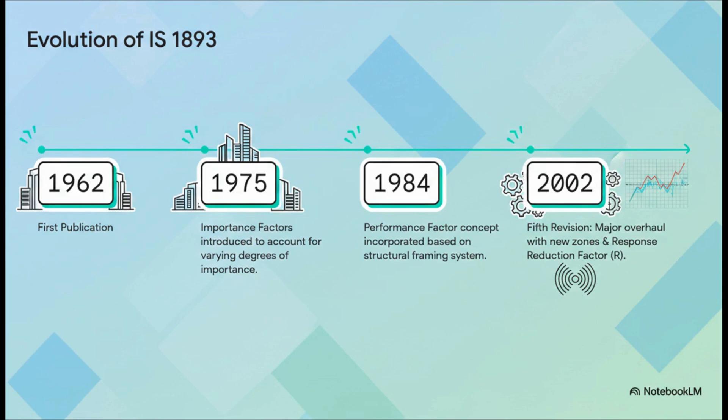Back in '75, we got importance factors. The idea that a hospital is more important to save than a warehouse. That makes sense, right? But wow, that fifth revision in 2002, that was a total game changer, heavily influenced by what we learned from the Bhuj earthquake. It really changed how we think about seismic design in India.

So what actually changed in 2002? Well, a lot. The seismic map was totally redrawn, for one. They got rid of Zone I because, let's be honest, no part of India is completely safe from earthquakes. But the real headliners, the two things that changed everything for designers were, one, specifying different rules for 3 different soil types, finally recognizing that building on rock is not the same as building on soft soil. And 2, introducing the response reduction factor, or R. This was a huge deal because it finally put a number on a building's ductility, a concept we're about to dive into.

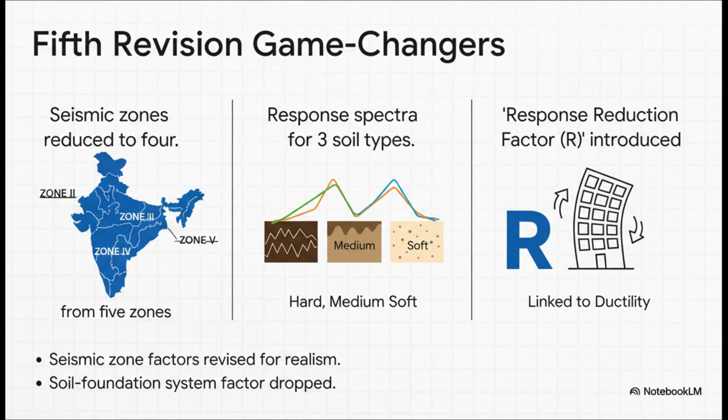Okay, so this leads us perfectly into the why behind the code. See, if you don't get the philosophy, you can't apply the rules right. IS 1893 is not about creating earthquake-proof buildings. That's just not realistic or affordable. It's about managing risk. It's about designing a building to perform in a very specific, predictable way when an earthquake hits. This quote right here from the code, this says everything.

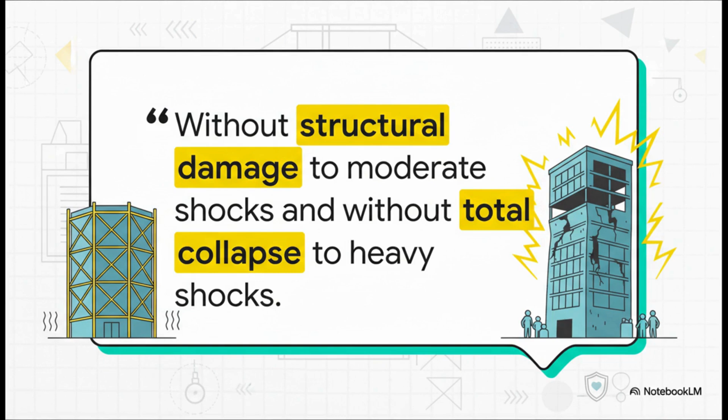It's a 2-level approach. Level 1, for a minor, more common earthquake, the building should be fine, no structural damage. Level 2, for a rare, massive earthquake, the building is allowed to get seriously damaged. It might even need to be torn down later, but it cannot collapse. Everyone must be able to get out safely. That's the deal. Life safety is the bottom line.

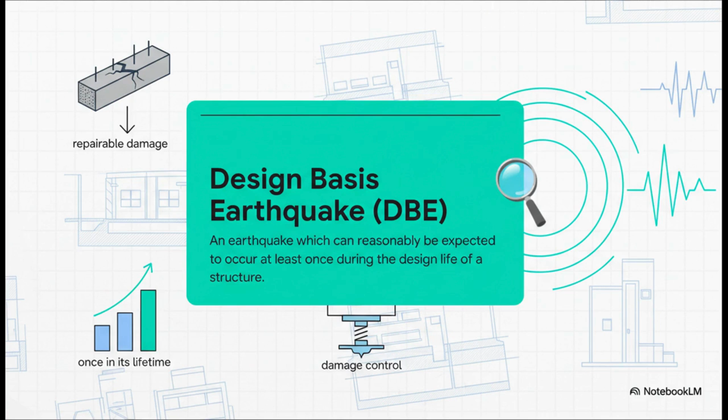So that first level is what we call the Design Basis Earthquake, or DBE. Just think of this as the moderate shakeup, the kind of thing that has a decent chance of happening while the building is still standing. Under a DBE, the goal is damage control. Sure, you might get some cracks, but they should be repairable. The building's core should be sound.

Then you've got the big one, the Maximum Considered Earthquake, or MCE. This is the worst-case scenario the code plans for. And here, the mission changes completely. We accept that there's going to be major damage. The building might be an economic write-off. But it has one job: stay standing long enough for everyone to get out. This is the ultimate life safety test.

So you might be asking, how does a building survive an MCE when the forces are way beyond what it's designed for? The magic word is ductility. It's a brilliant concept. Ductility is just a building's ability to bend and deform without snapping. It's just like a paperclip, right? You can bend it back and forth a bunch of times before it breaks. In a building, we create this effect on purpose through smart reinforcement detailing, allowing parts of the structure to yield in a controlled way. They soak up the earthquake's energy like a shock absorber, protecting the rest of the building from a catastrophic collapse.

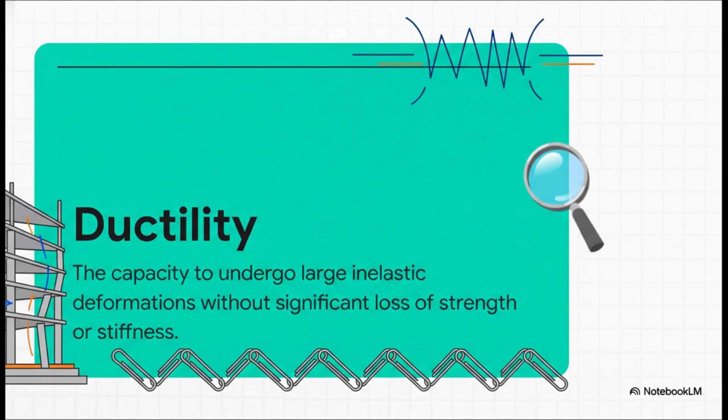All right, so we've got the philosophy down. Now let's get practical. How do we actually start designing? Well, step 1 is always figuring out the risk at your specific location. And IS 1893 helps us do that by splitting the country up into different seismic zones. As of the latest version, India is split into 4 zones, from the low-risk Zone II all the way up to the very severe Zone V.

Each zone gets a zone factor, Z. This number basically represents how hard the ground is expected to shake in the worst-case earthquake. So a Z of 0.36 in Zone V means the ground can kick sideways with 36% of the force of gravity. That's a serious number, and it's the foundation for everything that comes next.

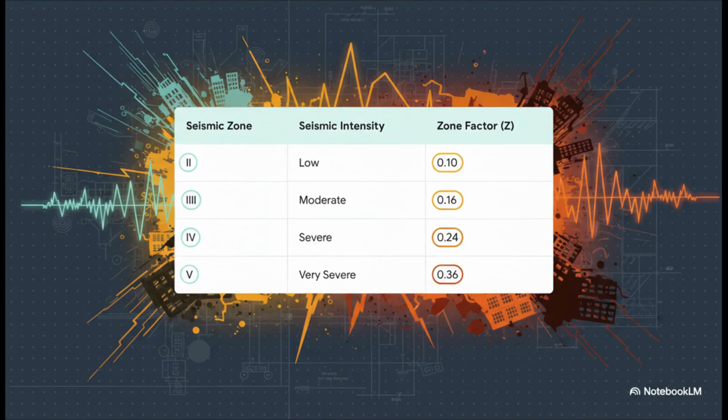Okay, we know our zone, now what? Now we have to turn that hazard level into an actual force, a number in kilonewtons that we can design our building to resist. The main way we do this is by calculating what's called the design seismic base shear. It's the total horizontal push the earthquake gives the building at its base.

And this is the main formula. At first glance, it looks easy, right? V sub B equals A sub H times W. W is just the seismic weight of your building. Pretty easy to calculate. The real magic, the real engineering, is all packed into calculating that little coefficient A sub H. That one value contains the entire design philosophy we just talked about.

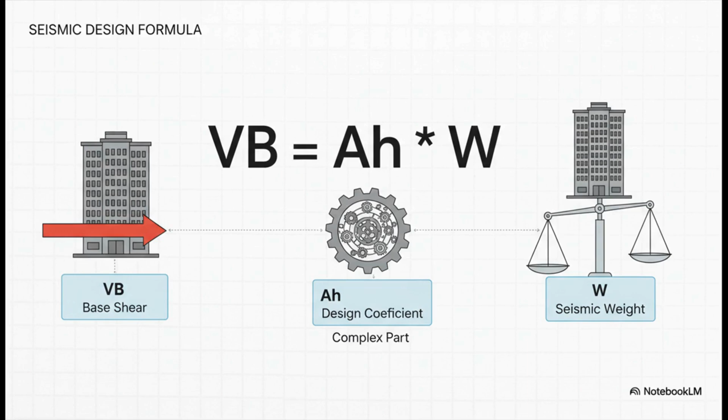So how do we get A sub H? The code gives us this formula, and it's like a recipe. Let's walk through it. You take your zone factor Z, and you divide it by 2. Now that's super important. It's how we scale down from that worst-case MCE to the more common DBE for our design. Then you multiply by I, the importance factor, divide by R, the response reduction factor, and finally multiply by Sa over g, the spectral acceleration. Let's look at each of those pieces.

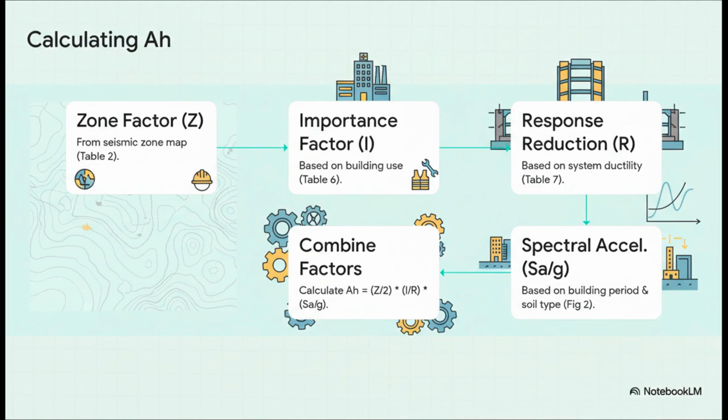First up, the importance factor, I. This is just common sense, really. A hospital or a school is way more critical after an earthquake than a warehouse, right? Of course. So the code says we have to design them to be 50% stronger, using a factor of 1.5. It's a simple multiplier, a built-in safety cushion for the buildings we need the most.

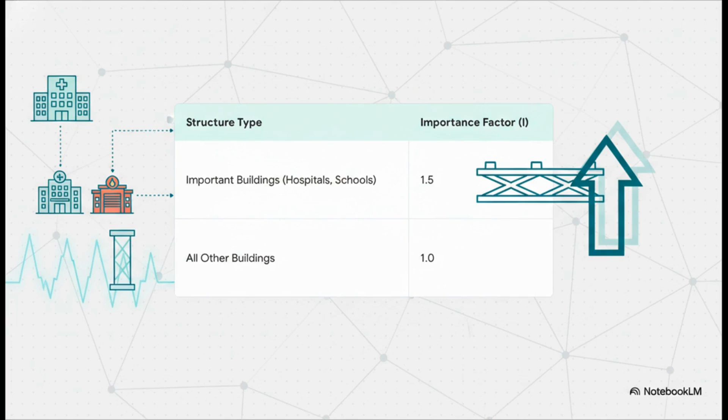Next up is R, the response reduction factor. And this, right here, is where good design really pays off. R is all about ductility. A really well-detailed ductile structure, like a special moment-resisting frame, or SMRF, gets a high R factor of 5. A less ductile, ordinary frame only gets an R of 3. What that means is the better, more ductile building can be designed for a much lower force.

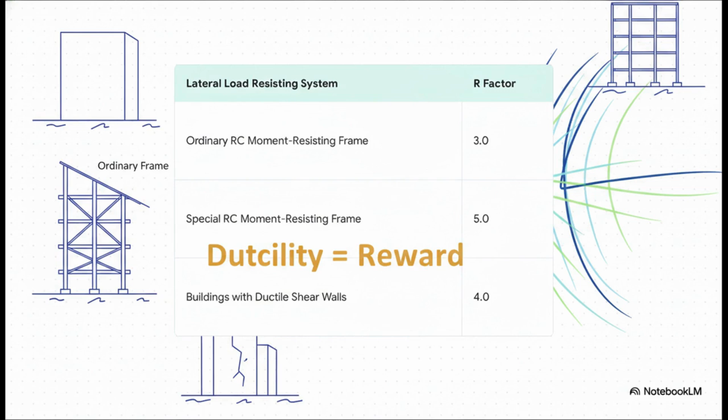But here's the warning. If you design for R equals 5, but don't actually build it with that special detailing, you're not doing good engineering. You're building a trap.

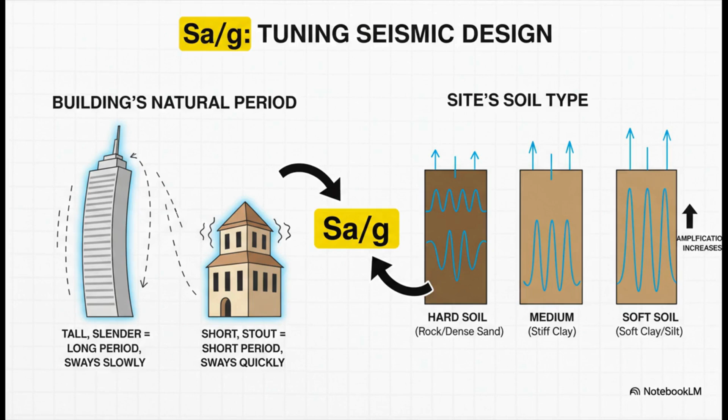And finally, we've got Sa over g. This is the factor that connects the earthquake to your specific building. It basically looks at 2 things: how wiggly your building is, its natural period, and what kind of soil it's sitting on. The code has these charts that show how forces can get massively amplified if you have a flexible building on soft, jelly-like soil. It's a recipe for disaster, and this factor makes sure you account for it.

Okay, doing the math is one thing, but honestly, it's only half the story. The code puts a massive, massive emphasis on the building's shape and its layout. Because a good seismic design isn't just about strength. It's about having a simple, predictable shape that gives earthquake forces a clear path to follow down into the ground.

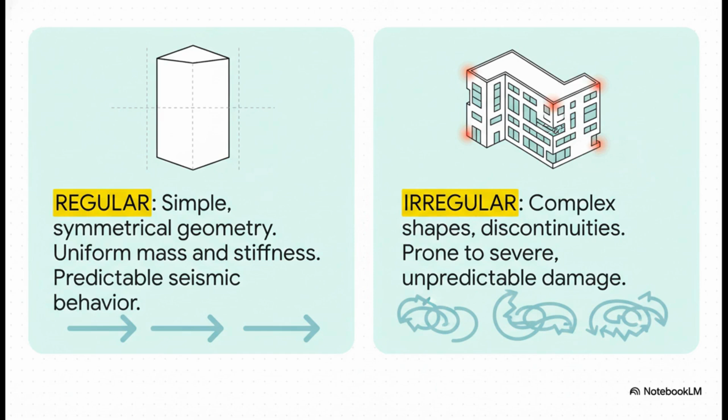The code basically puts buildings into 2 buckets, regular and irregular. Regular buildings are great. They're simple, symmetrical, and they behave predictably when the ground shakes. Irregular buildings, well, they're the complicated ones. L-shapes, big gaps, sudden changes in stiffness. These create weak spots and twisting forces. They're way, way more likely to get into trouble during an earthquake.

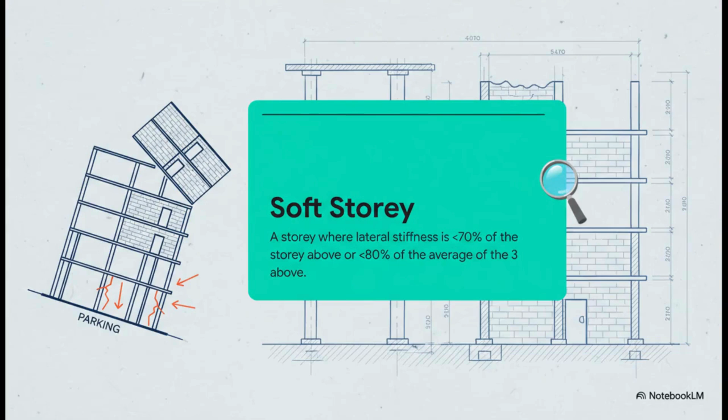And out of all those types of irregularities, there is one that is a notorious killer. It's a problem we see in buildings all over the country. And that is the soft storey. The code gets very specific with numbers, but you know exactly what this looks like. It's the apartment building with an open ground floor for parking.

You have all these heavy, stiff floors with brick walls sitting on top of a single floor with nothing but skinny columns. When an earthquake hits, that entire building tries to move as one block, and all of that energy gets concentrated on that one weak, flexible ground floor. It's a classic and incredibly dangerous failure mode.

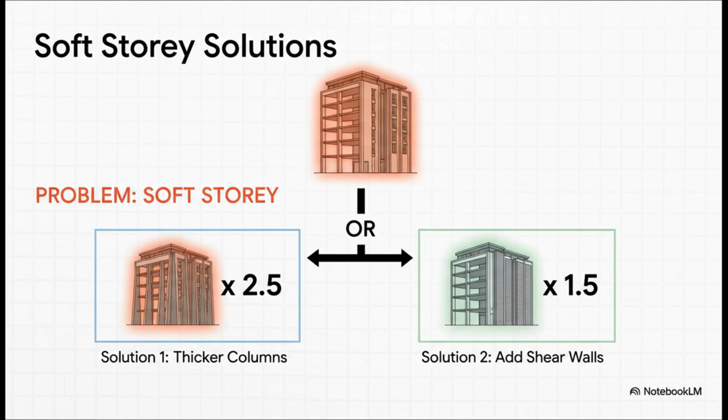Because this is so deadly, the code is absolutely brutal about it, as it should be. Clause 7.10 says that if you absolutely must design a soft storey, you have to make the columns and beams on that floor strong enough to handle 2.5 times the earthquake forces you calculated. It's the code's way of saying either get rid of this dangerous feature or make it unbelievably strong.

All right, that was a lot to take in. We've gone from philosophy all the way to specific formulas. So let's wrap this up by boiling it all down to the absolute must-knows for any professional using IS 1893 on a real site. Think of this as your mental checklist. First, get your seismic zone right. Everything starts there. Classify the building's importance to apply the correct safety factor.

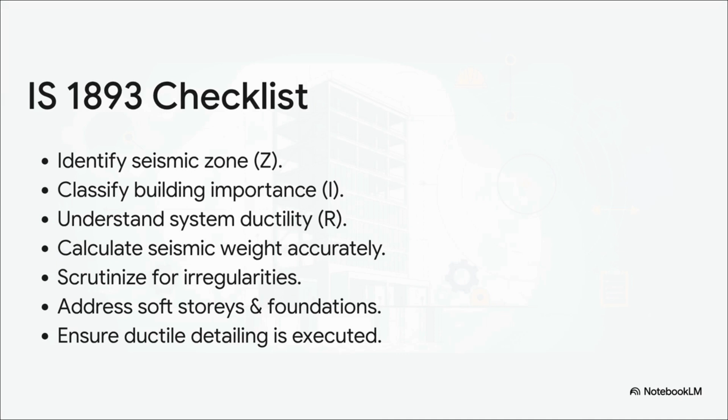Understand the system you're using and what its R value implies about ductility. Calculate your weight accurately. Hunt down any and all irregularities in the design, especially soft stories. And finally, and I'm going to say it one more time because it's that important, make sure the ductile detailing you designed actually gets built on site. Paper safety doesn't save lives.

And that's where I want to leave you. It is so important to remember that IS 1893, just like any building code, is the minimum legal standard. It's the starting line, not the finish line. For us, as the professionals entrusted with keeping people safe, the real question isn't just, did my design meet the code? The real question is, how can I go beyond the minimum to build something that's not just compliant, but truly safe and resilient? That's something to think about on your next project.